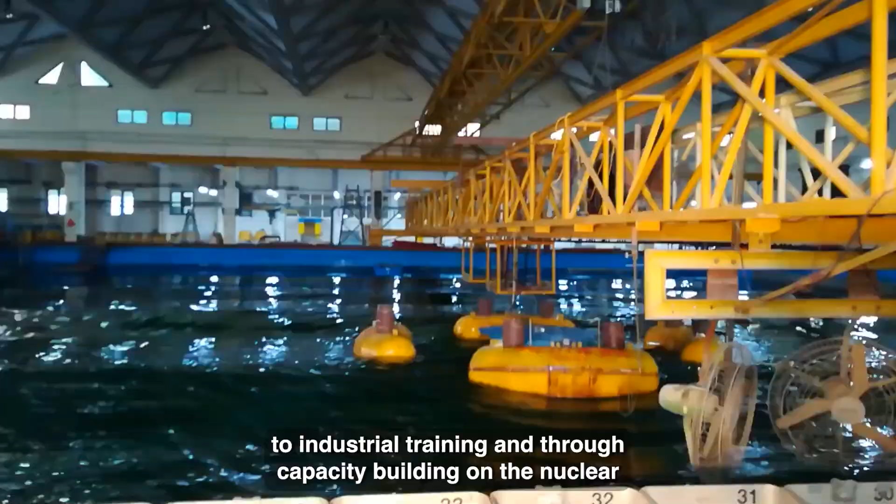This maritime engineering program is a very special program with multidisciplinary input from mechanical, civil, structural, aerospace, naval architecture, chemical engineering, electrical, electronics, and applied mechanics. It is dedicated to industrial training and thorough capacity building on the new trade of the maritime sector. It's a growing economy which will give a lot of job opportunities and research frontiers as India grows. The Blue Corridor effect, planned by the Government of India, is an important mission requiring maritime engineering growth in the country, and this program caters to that expected capacity building.

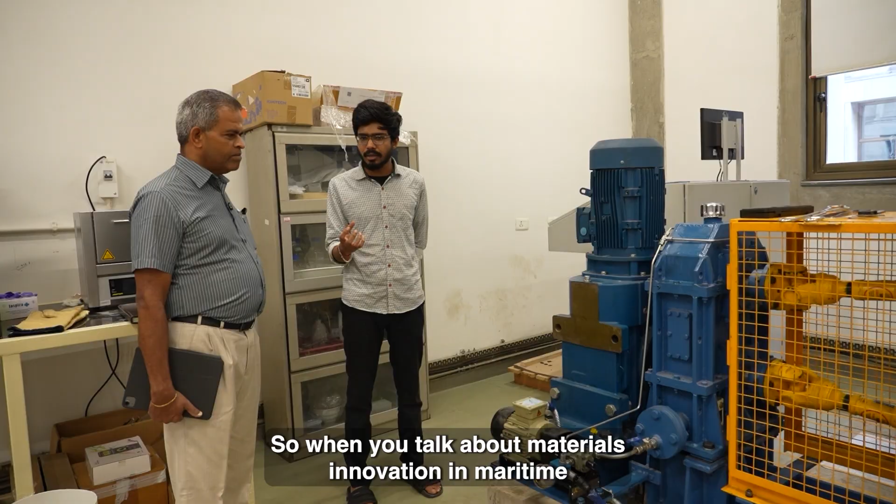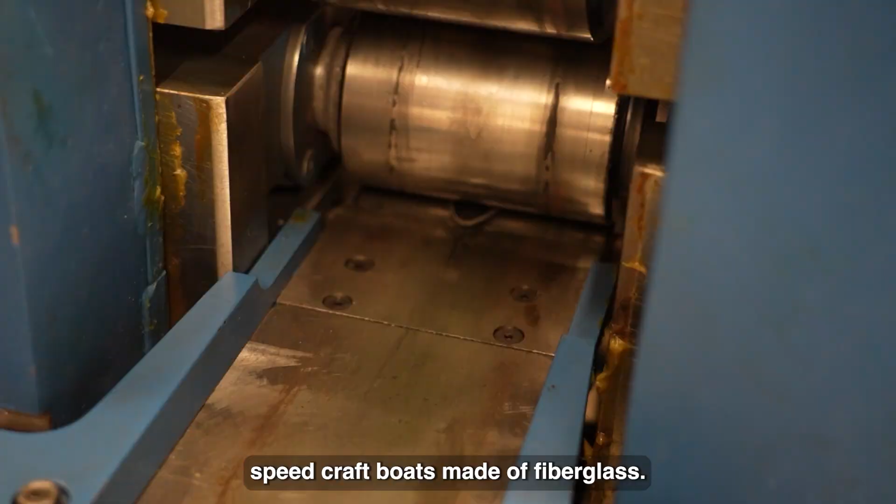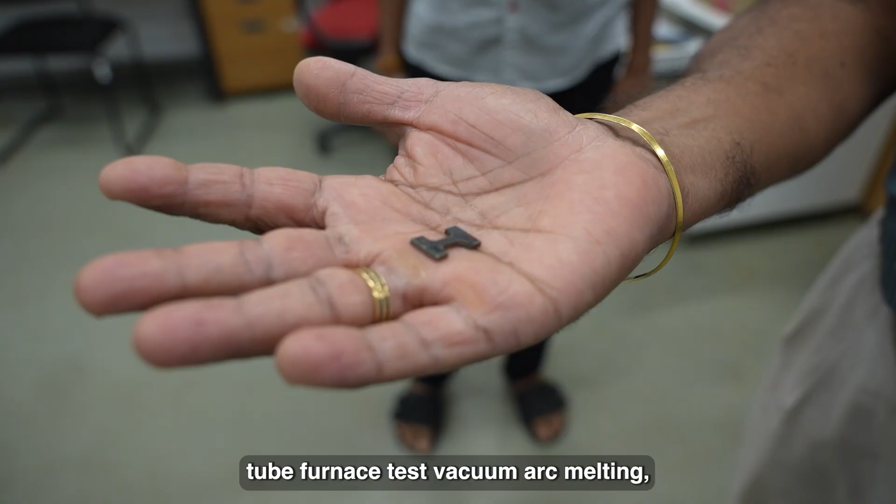Friends, this is part of the material science engineering laboratory which is a teaching aid for the maritime engineering program. When we talk about materials innovation in the maritime industry, concrete and steel have been conventional choices, but we now have titanium vessels and high-speed craft boats made of fiberglass. These are advanced materials that do not come across conventional standard design codes of practice. We conduct box furnace tests, tube furnace tests, vacuum arc melting, induction melting, vacuum induction melting, and vacuum sealing, all present in this small segment of the material science laboratory.

Friends, a typical furnace has an operating temperature for testing specimens that can go very high. Generally at room temperature and ambient conditions, mechanical properties will not alter much. As you'll see in the course lectures, the strength of the material gets degraded when the temperature rises beyond 600 degrees. So when designing for fire resistance, you must choose an alloying element such that the strength doesn't degrade beyond 600 degrees Celsius.

Welcome to the ambience of the IIT Gandhinagar lecture theatre. This is one of the interesting classrooms where maritime engineering classes will be conducted. We have state-of-the-art projection facilities and good audio-visual recording systems. Once the lecture is over, the system can generate PDF files of the lecture directly, which are emailed to your email IDs. This state-of-the-art facility at IIT Gandhinagar ensures lectures are recorded for life and shared with students immediately. This is the IIT Gandhinagar library.

This library has collections of books referred to as standard textbooks and references for the course and program. It also has many online editions of design codes of practice, reference materials, and e-collections of various video lectures of international courses and programs related to maritime engineering.

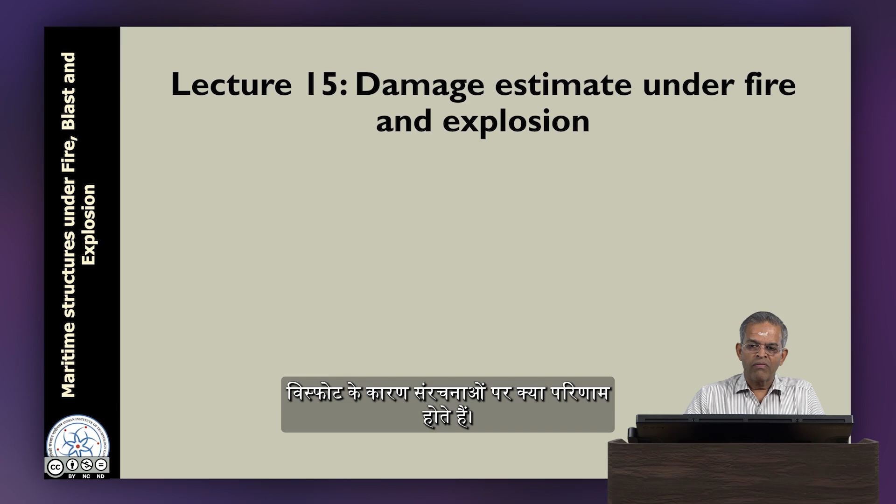Friends, welcome to the 15th lecture on the course Maritime Structures under Fire, Blast and Explosion, offered by IIT Gandhinagar under Swayam Prabha. In this lecture we will discuss damage estimation under fire and explosion and learn about some effects of fire and explosion on structures. So far we have learned the characteristics of fire and explosion, how they occur, chemical combustion reactions, and how to control them. Now we will move into fire structural engineering, where we will discuss the consequences of fire and explosion on structures.

As a continuity of our last lecture, flammability diagrams are a useful tool to control fire. Once the flammable region is established for a particular fuel mixture, it can be used as an effective tool to avoid fire accidents. This can be done by admitting or allowing more fresh oxygen into the containment, which reduces the concentration of the fuel mixture. Remember, this only applies when it is a fuel-controlled fire; if it is a ventilation-controlled fire, this cannot happen. Usually in hydrocarbon industries, accidents are generally fuel controlled, so allow more fresh oxygen to reduce the fuel mixture concentration.

When you allow the fuel mixture concentration to change, it gets diluted. As concentration decreases, there is a subsequent change in the flammable limits of the mixture, and the flammable region converges sharply. If you replot this, you will notice the flammability diagram nose and the flammable region get contracted due to reduction in fuel mixture concentration.

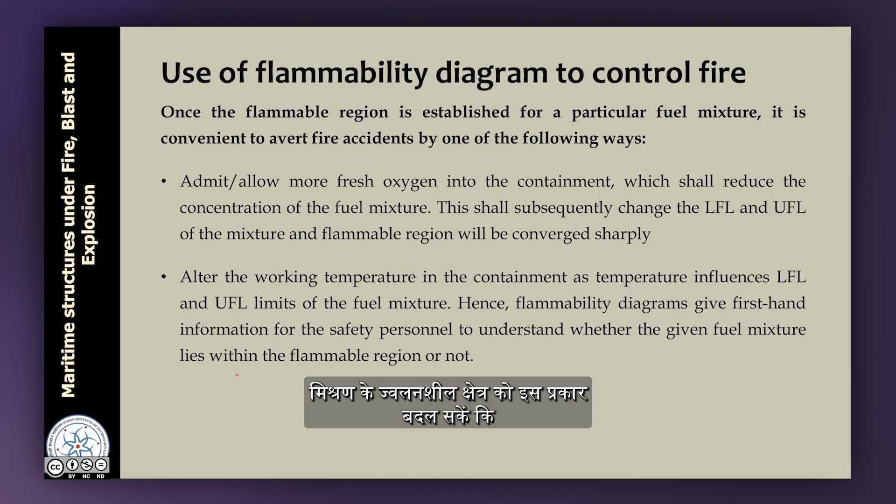Therefore, flammability diagrams help give first-hand information about fire accidents to safety personnel, which can also help control fire accidents before they happen, or at least limit them to some extent, so that we can alter the flammable region of the mixture such that the fire avoids sustainable growth and burning stages.

One can also estimate the damage under fire and explosion. Let us see how we do it.

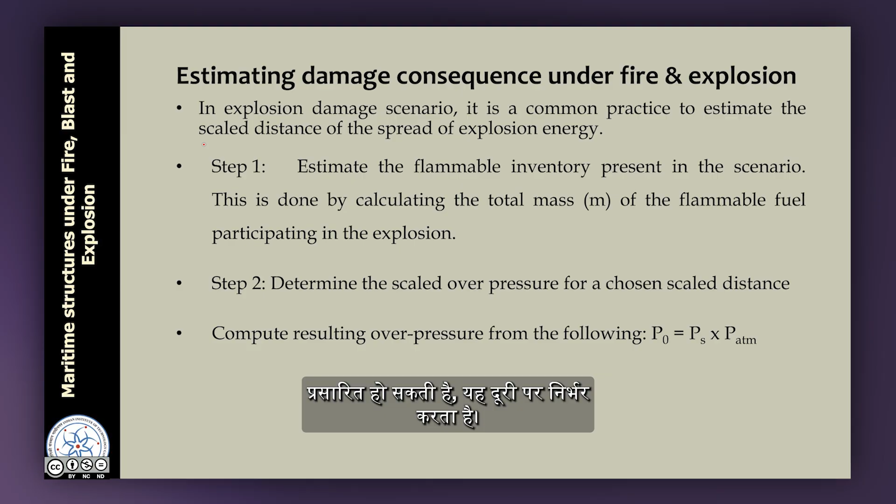In an explosion damage scenario, it is a very common practice to estimate the scaled distance of the explosion energy, that is, how far the explosion energy can spread or propagate. So first let us compute the flammable inventory present in the scenario.

This can be easily computed as what we call the fire load. If you know the mass which is participating in the explosion, one can find the total mass of the flammable fuel. If I know that, I can always find out the scaled overpressure.

Computing this equation, the scaled overpressure can be computed if I know the atmospheric pressure. Then I can always estimate the overpressure from this equation, where the scaled distance ZE is known to me.

Once I know the scaled distance, I already did a problem in the last lecture, please refer to that. If we know the scaled distance, depending upon the overpressure computed using this equation, we can qualitatively look at the damage, which can also be quantified to some extent.

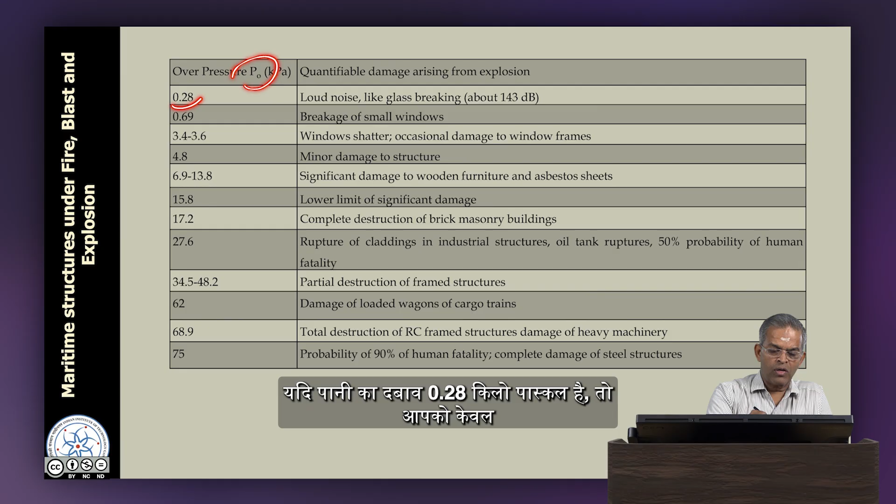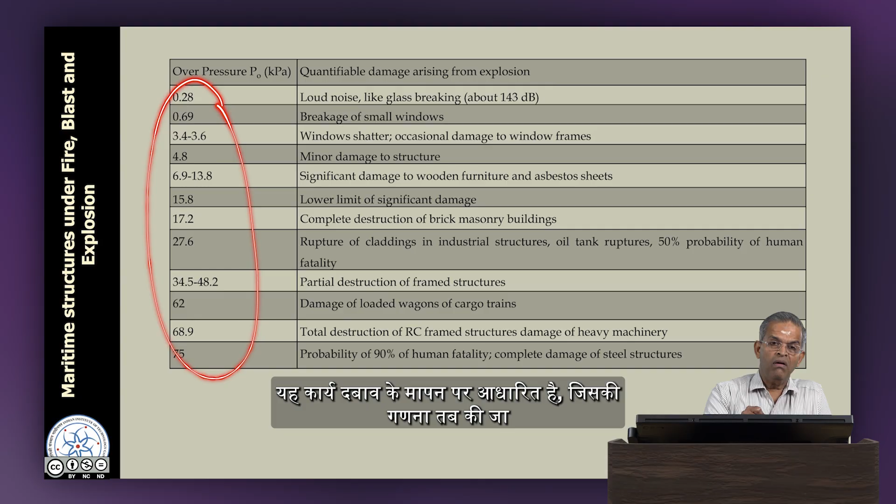If the overpressure is about 0.28 kilopascal, you will only hear a loud noise and glasses will break. If the scaled overpressure touches 75, it can cause human fatality. So one can relatively find out the consequence of the explosion in terms of damage to humans, buildings and structures, based upon the scaled overpressure, which can be computed if I know the scaled distance.

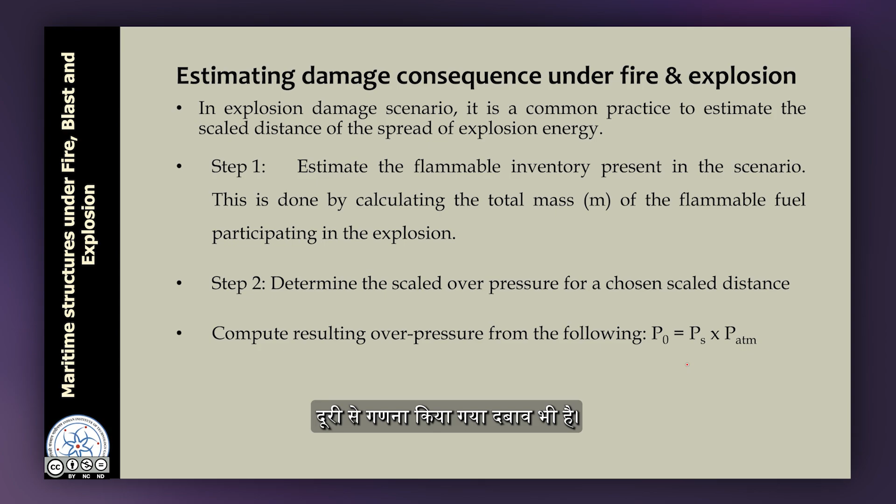So, scaled overpressure is also the pressure computed from the scaled distance. I can use this equation for doing this.

Having said this, let us now move on to a very important understanding of fire that has happened in structures. Let us say this is a fire engineering laboratory, a dedicated laboratory we have at IIT Gandhinagar. You can see the full-scale 2-story building, which was set on fire to understand the real-time scenario and behavior of structural elements under fire.

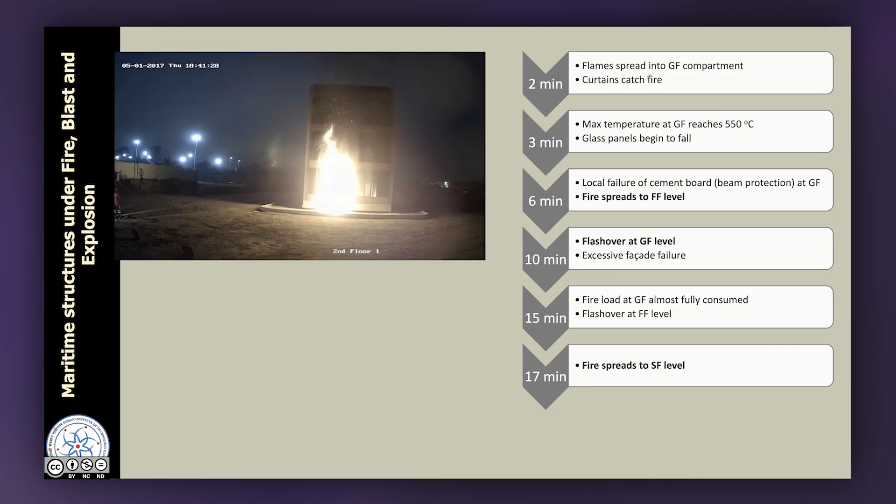So when this happens, in just 2 minutes on the time scale shown here, the flame spreads into the ground floor compartment. The curtains provided in the compartment all catch fire. In the third minute, the maximum temperature on the ground floor reaches 550, so all the glass panels present start breaking and falling. After the 6th minute, the local failure of the cement board, used as beam protection at the ground floor, fails.

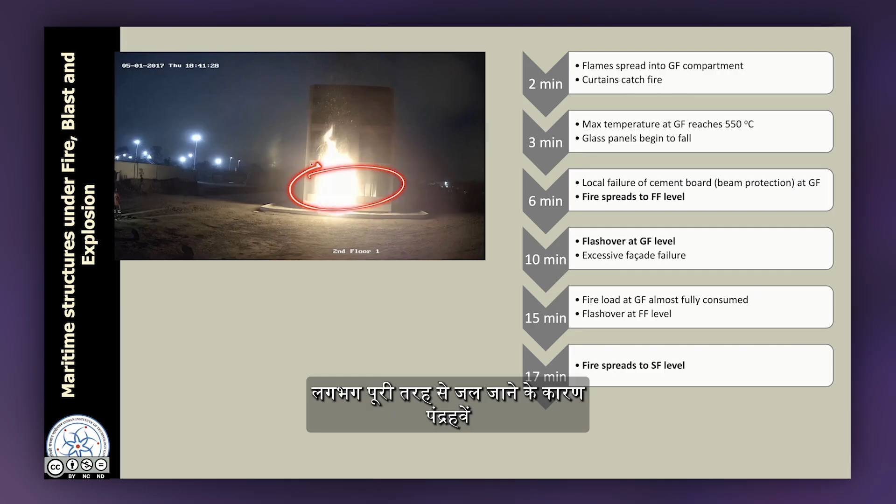So fire spreads to the first floor. In the 10th minute, flashover took place on the ground floor, so all the external facades failed. In the 15th minute, fire load at the ground floor is almost fully consumed, and flashover happens on the first floor. In the 17th minute, fire spreads to the second floor.

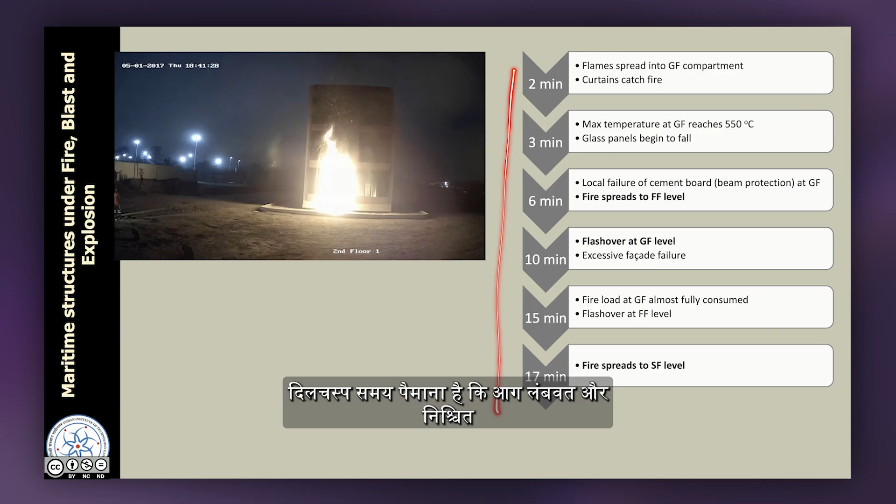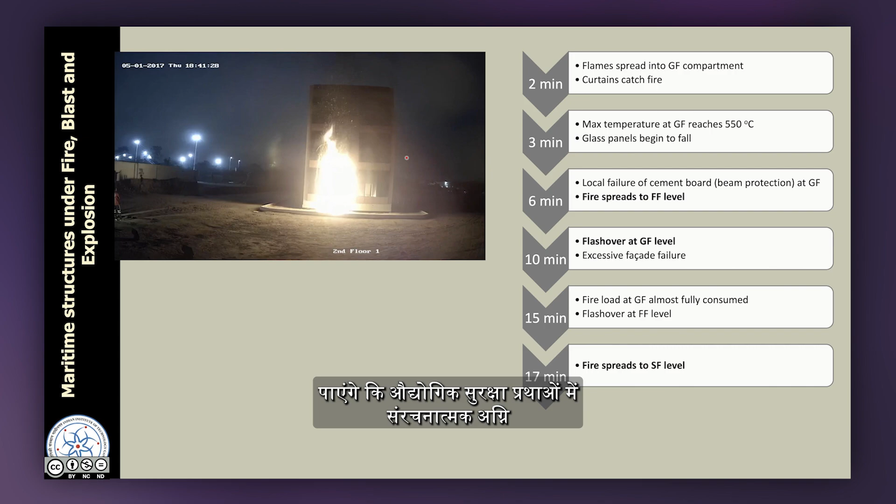It is a very interesting time scale to understand how quickly fire spreads vertically and circumferentially. Professor Gaurav will discuss more in detail about this particular setup, and he will also show you the video of this later in his lecture. You will understand that structural fire engineering is gaining momentum in industrial safety practices because the timeline with which it happens and causes devastation is a very important concern for all engineers.

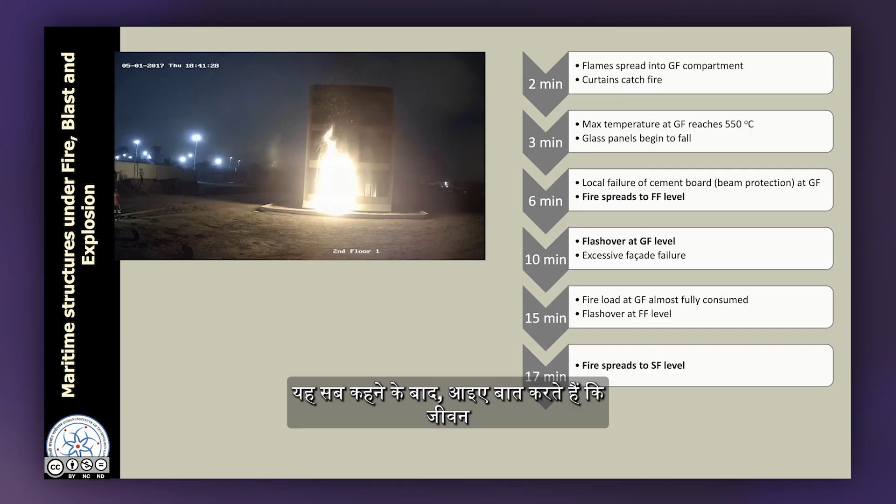Having said this, let us talk about the concerns we have from fire about life safety.

Let us say this is an elevation of a building, not the same building I showed in the previous slide; it is a different concept, right. So, generally near the ceiling you always have smoke detectors and you have vents to release smoke and gas. Firefighting systems are placed as a part of this.

There are also sometimes smoke ducts provided in every floor near the ceiling so that the smoke can escape through this vent. It can be either artificial, what we call mechanical ventilation, or natural. You will see in most high-rise buildings, when the floor height is very large, let us say 4 meters plus, there are always ventilators provided near the top.

There are two reasons for this. One, these ventilators will cool down the air inside the room and the room will remain cool, and also this acts as fire ventilation or smoke ventilation in case of fire.

So, it is very important to learn that in case of fire, to have effective escape planning, you should plan good sizing of the corridors, because people will start escaping only through the staircase, because the lift cannot be used during fire. There is a note given: do not use lift during fire. So, people do not use lifts. They use the escape corridors provided at one end of the building.

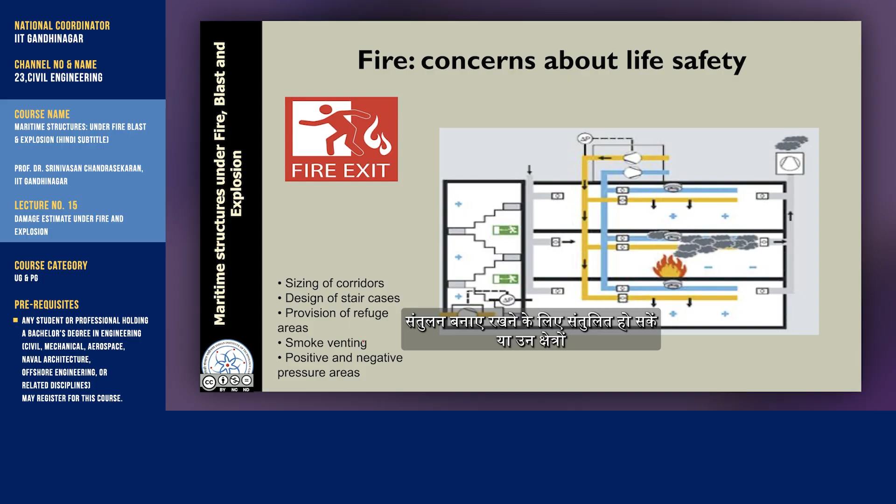There are segments where positive and negative pressure areas can occur. We already saw how negative or suction pressure causes damage during explosion. So, one should take care of these segments and also evacuate these negative pressure segments easily, to maintain the pressure balance in the areas affected by the impulse force caused by an explosion or fire.

Having said this, friends, Kerber also did an analysis to explain the timelines between modern and legacy structures. The modern fire timeline and the legacy timeline are compared here. In the modern fire timeline, where we use modern materials like cellulose fibers, wood dust, furniture, lots of curtains, false ceiling, etc., there is a very short time to flashover; it happens very quickly.

Whereas in the legacy fire timeline, it takes some time to establish this. So, modern construction materials are quite dangerous because they can catch fire and there is a very short time to flashover. Even the longest time to flashover is very quick: in the legacy case it is about 35 minutes from the start of fire, but here within 5 minutes you have the flashover.

Then when you look at the time to collapse of unprotected floors, it usually took about 50 minutes, about an hour. Nowadays it is within 15 minutes; you have seen an example where in 17 minutes the ground floor and first floor burned completely and the fire moved to the second floor. So, in the modern fire timeline, the time to collapse is about 12 minutes from the start of fire, where it used to be about 50 minutes to an hour.

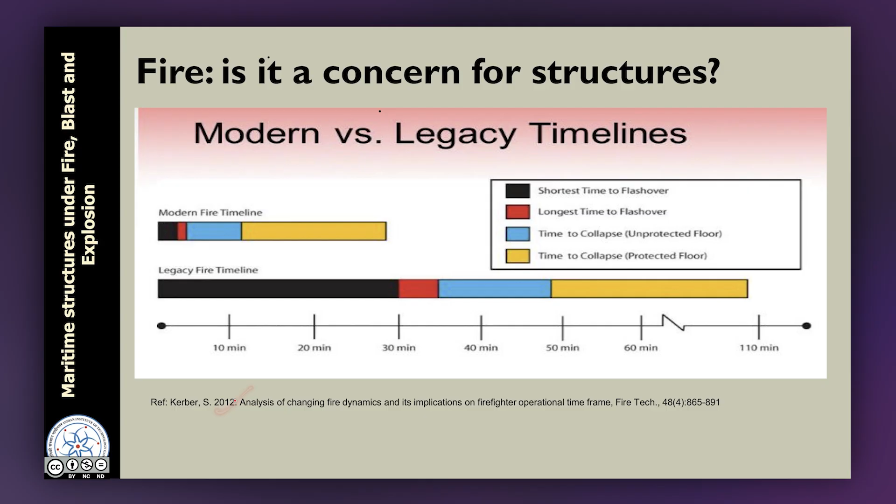Kerber gave a good analysis of this, and we acknowledge his work published in the Fire Technology Journal in 2012. So, please read this paper to learn more details about why fire is a concern for structures.

Now, as a structural engineer, let us see what the main effects of fire are. One serious effect of fire is thermal expansion, arising from uniform heating. I have got two examples here: unrestrained and restrained systems. In unrestrained systems like this cantilever, when subjected to an increase in temperature, the steel gets heated and expands because it is free to expand. The temperature rise for a simple steel of 350 megapascal yield strength goes to about 175 degrees Celsius. And when it is unrestrained, it does not induce any additional stresses in the member.

But when you restrain them from expanding, they will induce thermal stresses, which are a function of the Young's modulus of steel, the coefficient of linear thermal expansion of steel, and the delta T, the increase in temperature. So, this will induce what we call thermal stresses, which were not present when it is unrestrained. That is the first issue. It induces thermal stresses in addition to the conventional bending, shear and torsional stresses for which buildings are designed.

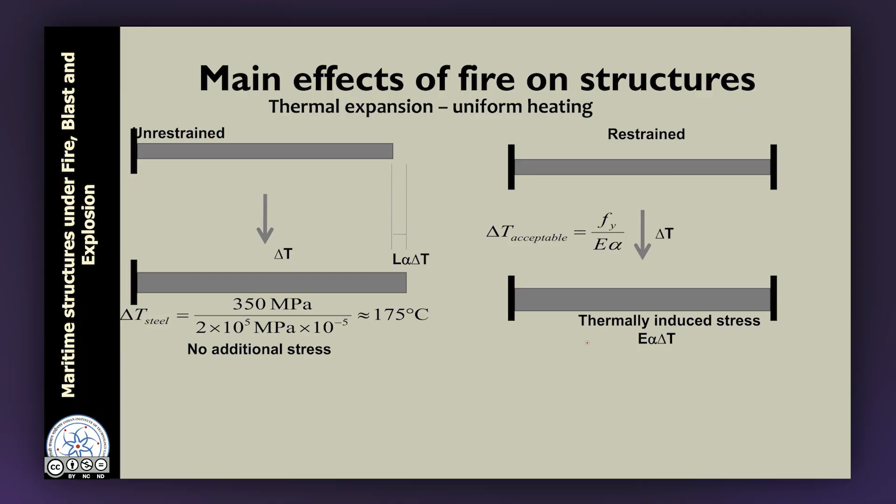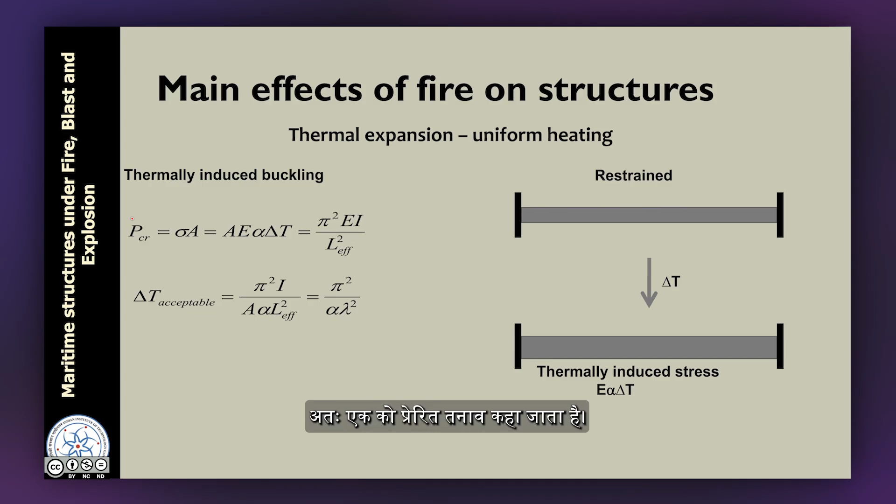The second issue is that it induces something called thermally induced buckling. In a restrained system, you also have thermally induced stresses. They will also create a buckling force, proportional to these stresses, which is compared against pi square EI by L square, which causes thermally induced buckling. So, one is thermally induced stresses, second is thermally induced buckling as well.

The next one is that it also causes thermally induced curvature. When you see a building after fire accidents, you will notice that the members, especially in steel structures, have actually bent. Sometimes they are twisted, they are warped also. This curvature is not caused by bending or loading; it is caused by a temperature rise which is different on the two sides of the member.

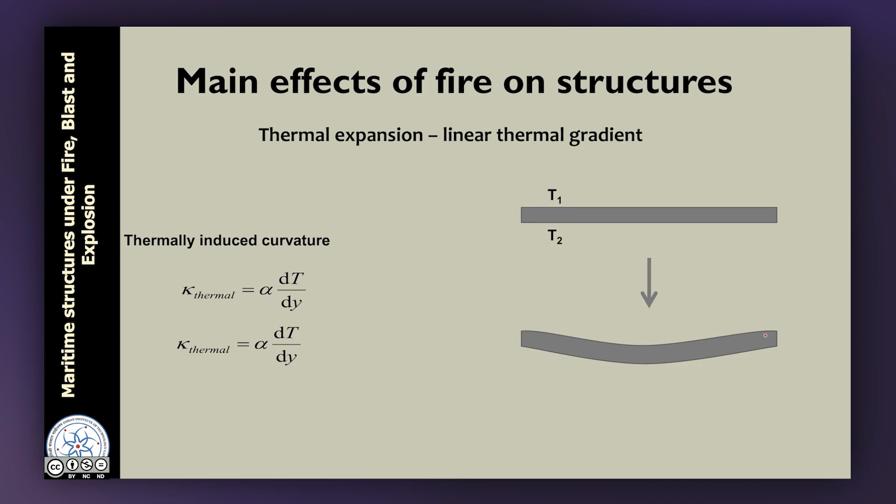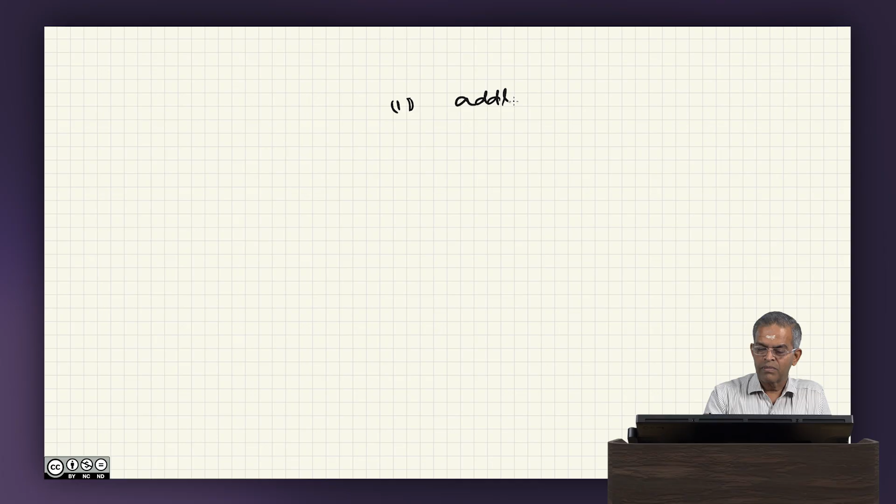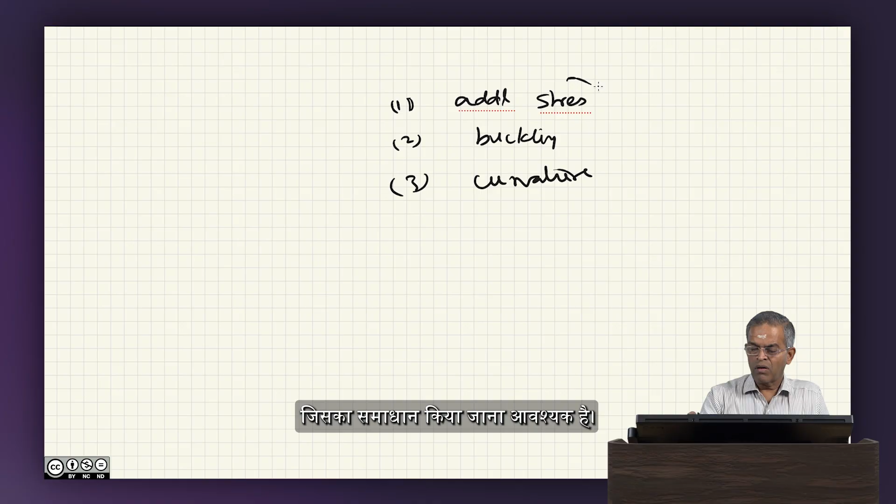So, if the member is, let us say, a 500 mm deep steel structural I section, with this surface in fire and this surface not in fire, the temperature gradient between the two surfaces causes additional curvature like this. So, friends, we can quickly say temperature induces additional stresses, it causes buckling, and it also causes additional curvature, which are all to be addressed in fire resistant design of structures.

We will take up an example later, and using MATLAB we will help you find the thermal gradient between the point exposed to fire on a beam and the point not exposed to fire on the same beam. We will plot the temperature gradient in a design example and show you later how this can be computed.

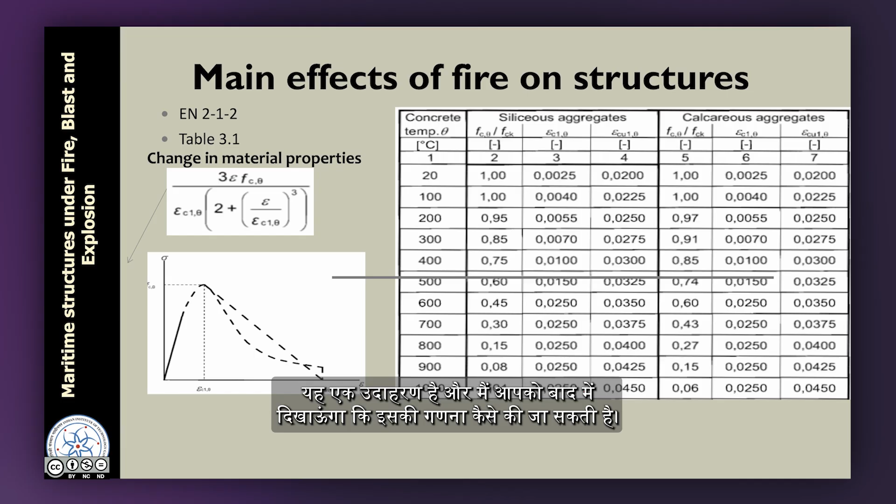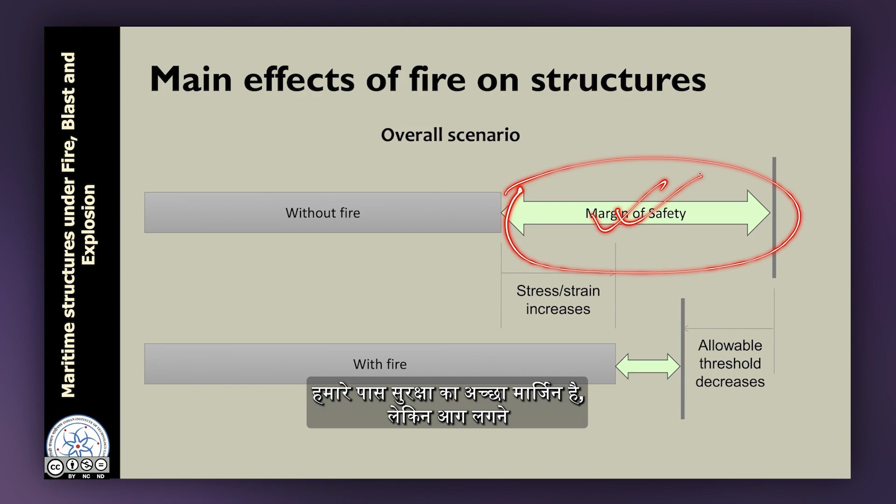Let us see what the main effect of fire on structures is. Without fire, in design we have a good margin of safety, be it any design method: elastic design, plastic design, limit state design. But with fire, this margin of safety reduces in two ways. One, there is an increase in stress and strain, as I said, thermally induced stresses.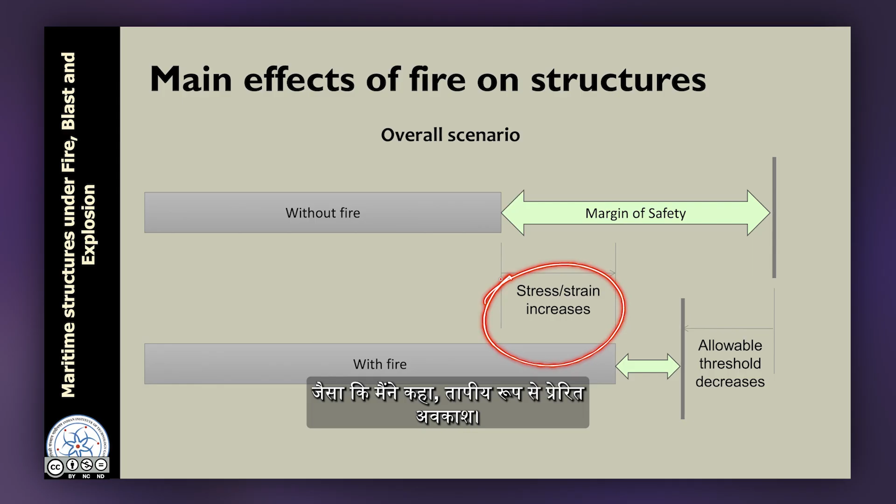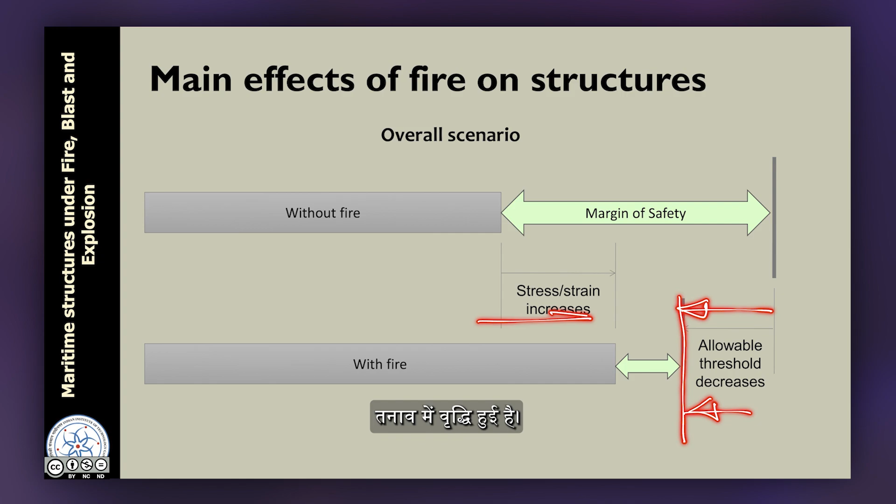There is a decrease in allowable strength at high temperature, because we already saw the properties of material. For example, steel degrades; strength and yield strength degrade as the temperature increases. So, there is a decrease in strength and an increase in stress; both of them together eat away this margin of safety. That is a serious concern in design.

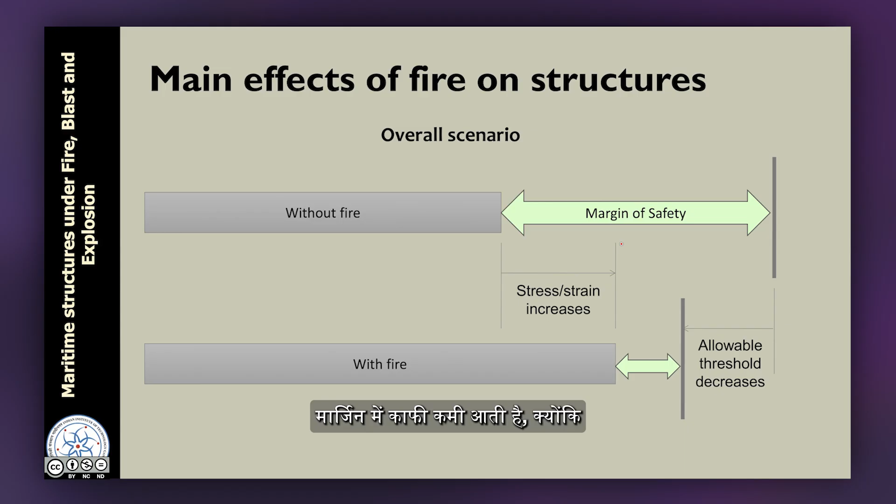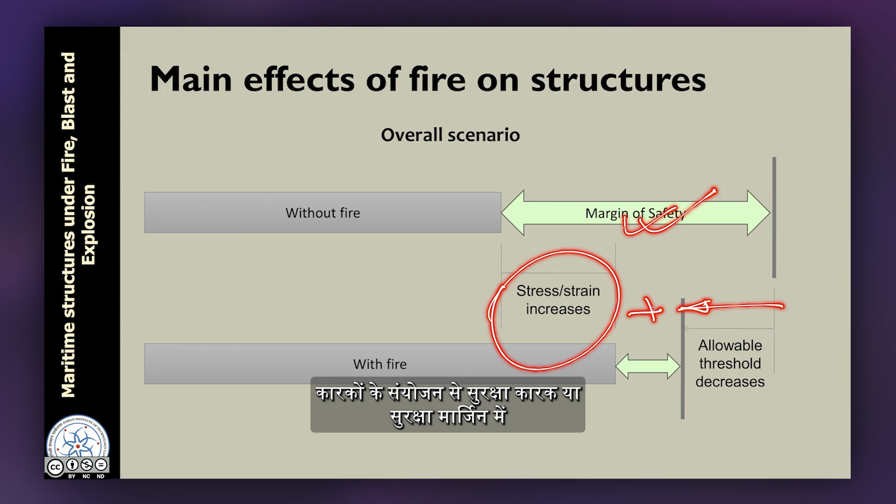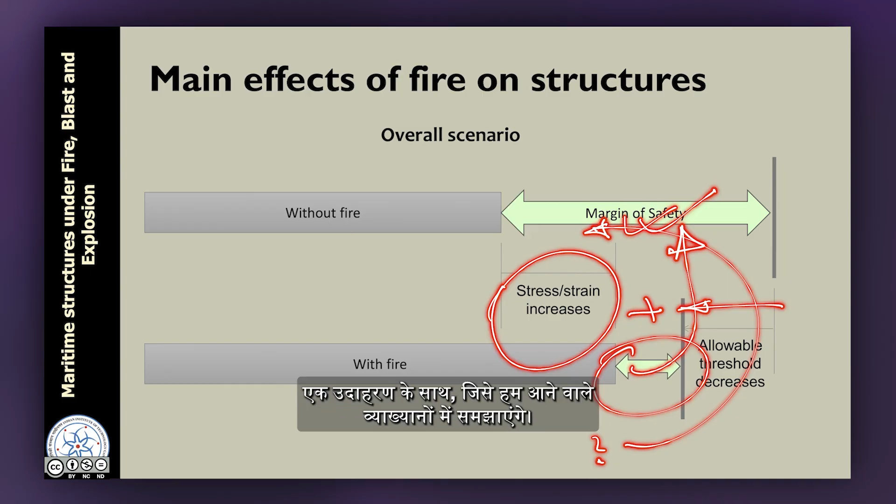So, one of the direct impacts of fire on design is a good reduction, a compromise on the margin of safety in design, because there is an increase in stresses caused by thermal variations and a decrease in strength of the material at higher temperature. Both of them put together decrease the factor of safety or margin of safety which usually should be present in the design. So, what is this reduction? We will explain it with an example in coming lectures, but the concern is this.

So, friends, let us visually see what are the effects of fire on structures. This is a study conducted by Lincy et al., published in 2012 on thin wall structures. The reference is available here. I would strongly recommend that you go through this paper to understand more in detail. I am only showing the conceptual part as we understand from this particular paper. According to Lincy et al., structures when set to fire show instability effects.

This study was conducted on steel structures: fire safety analysis of 3D frames based on full scale fire tests. Steel structures show a lot of instability effects. That is the number one observation made. The second is they undergo large deformations. There are some permanent deformations, which are otherwise referred to as plastic deformations. All these are observed in full scale tests conducted on steel and concrete.

For example, let us look at concrete structures, studied by Abbasi and Hogg in 2006. The reference is available here. In concrete structures, similarly, fire creates instability effects. It also imposes large deformation. It also shows permanent damage. In addition, it shows spalling of concrete, what we call fire induced spalling. Concrete withers off at high temperature and enables steel to get directly exposed to fire. Both steel and concrete structures are equally vulnerable when subjected to high temperature, or fire and explosion.

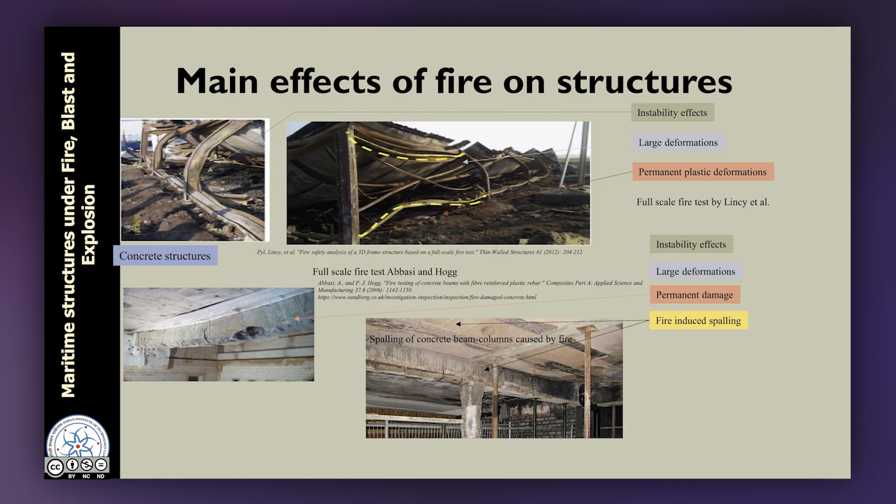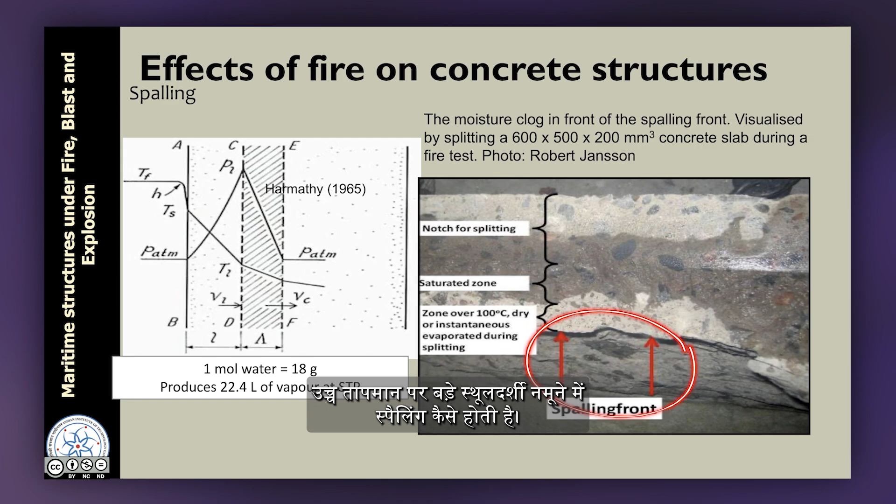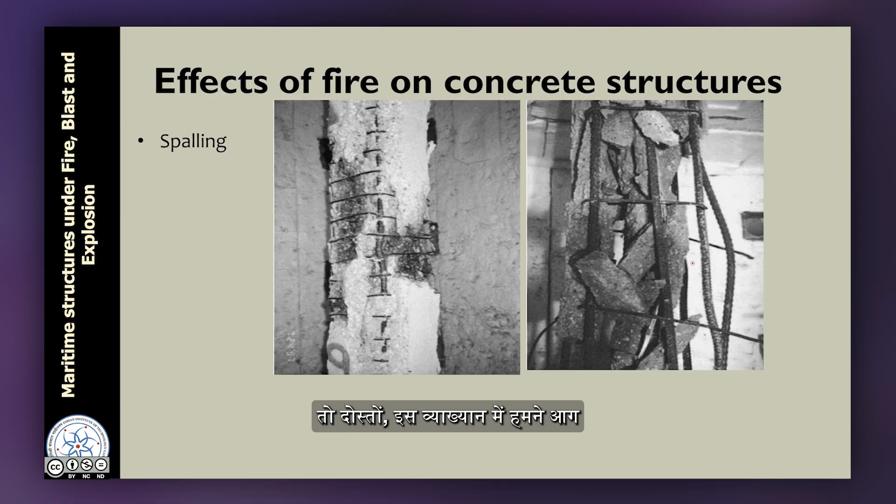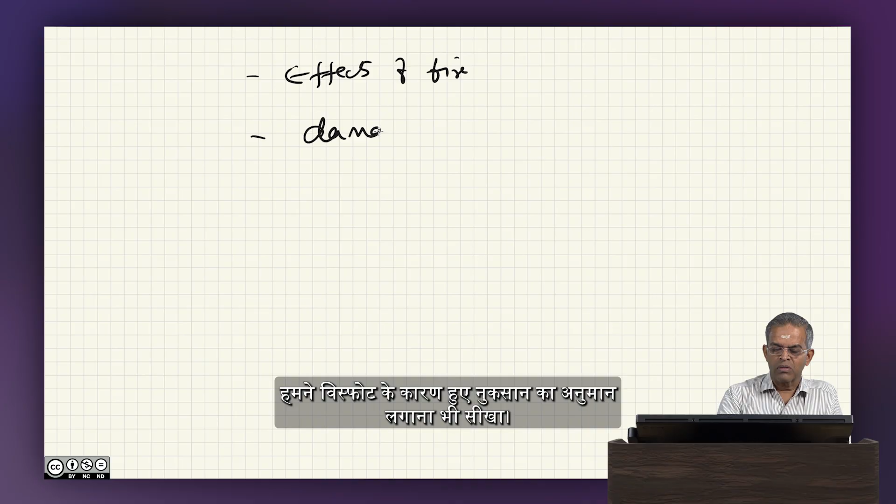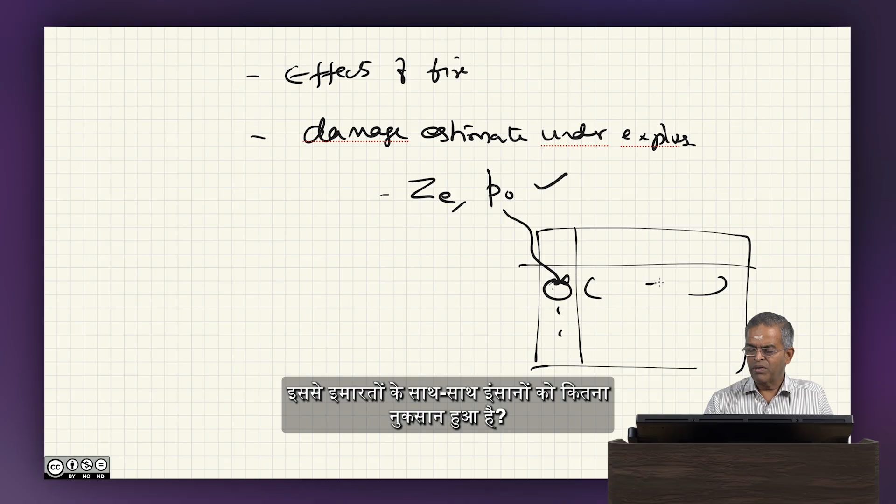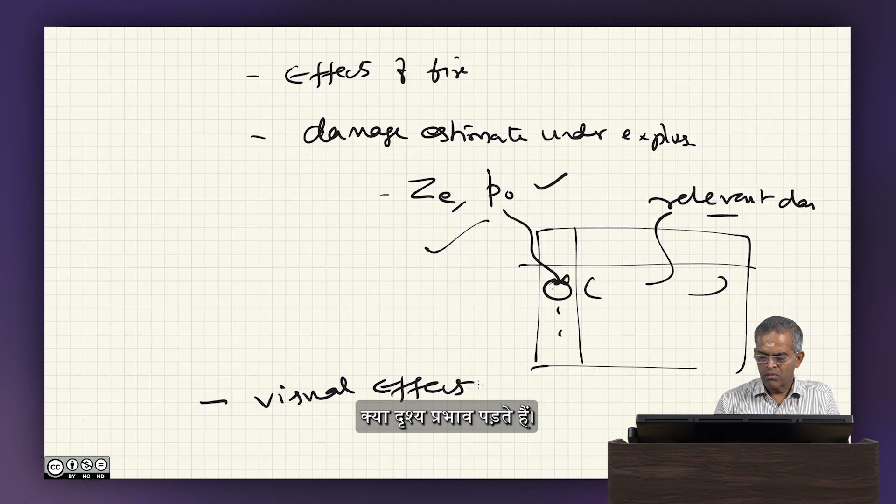So, friends, in this lecture we learned the effects of fire, and we also learned how to compute the damage estimate under explosion. For example, if I know how to compute the scaled distance, and we can also compute the peak overpressure, then with the help of a table given in the literature, I can compute, for a specific value of overpressure, the relevant damage to structures as well as humans. We have also understood the visual effects of fire on structures, and why fire is a botheration in structural design.

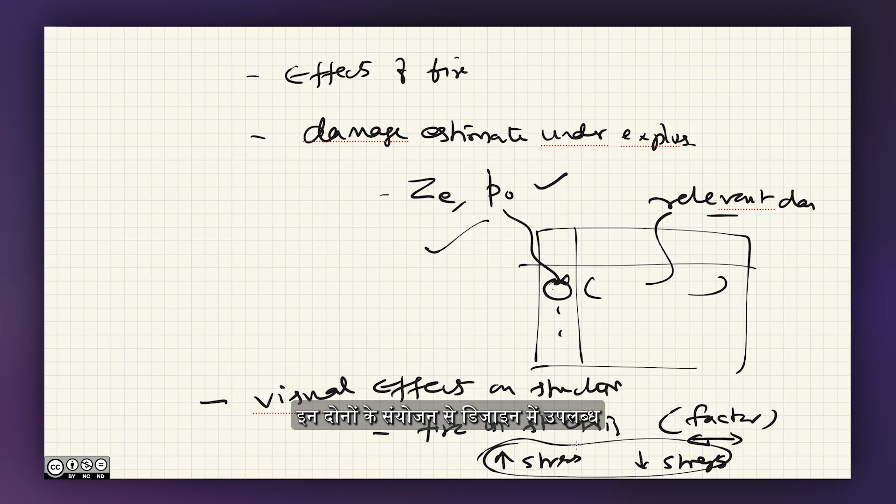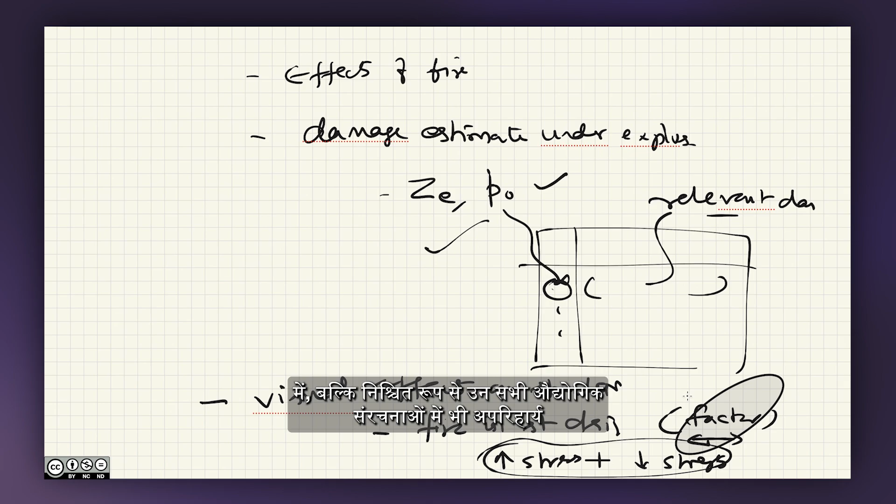The factor of safety or margin of safety gets reduced because of the increase in thermal stresses and the decrease in strength at high temperature. These two put together decrease the factor of safety margin available in the design. Therefore, the design becomes more vulnerable to failure. Therefore, friends, fire and explosion resistant design becomes inevitable not only in maritime structures, but in all industrial structures which deal with flammable chemicals.

However, for maritime structures, we are dealing with oil and gas exploration, oil and gas storage, processing plants, or even ports and harbors where LNG and CNG terminals are handled. Therefore, we are more vulnerable to these damage scenarios, and maritime engineers should be aware of how to design structural systems, be it steel or concrete, for known fire scenarios, and also plan emergency response for fire rescue operations to save assets and personnel involved in the specific operation.